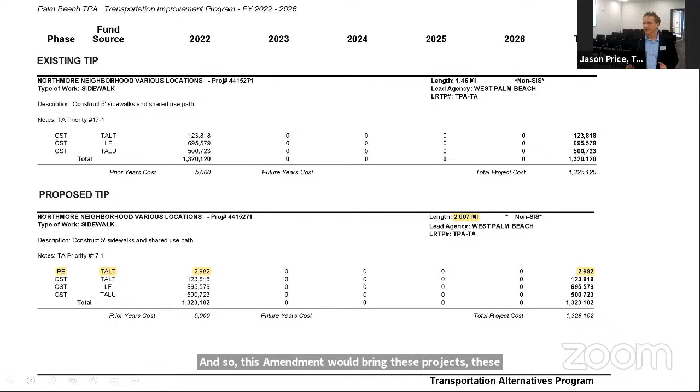And with that, that's the conclusion of the presentation, and I'll take any questions at this time. We're looking for a motion to recommend adoption of Amendment 2.

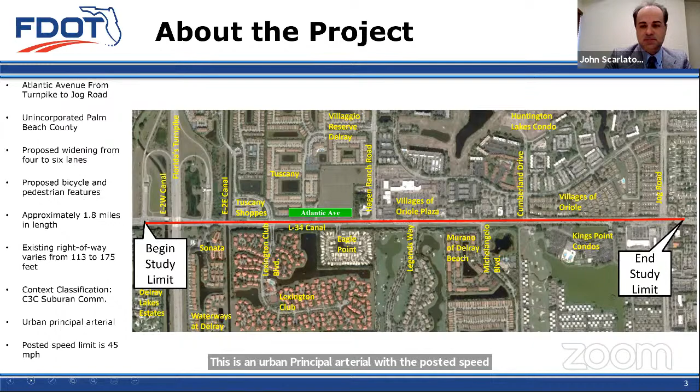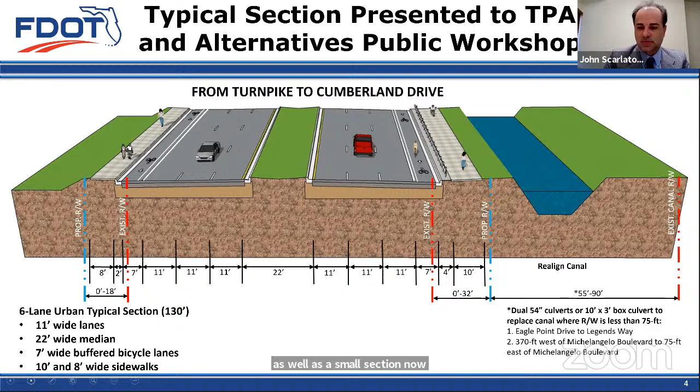So with this typical section from Eagle Point to Legends Way, that would be our tightest area where we would likely be needing to box the canal, as well as a small section near Michelangelo Boulevard for about 370 feet or so.

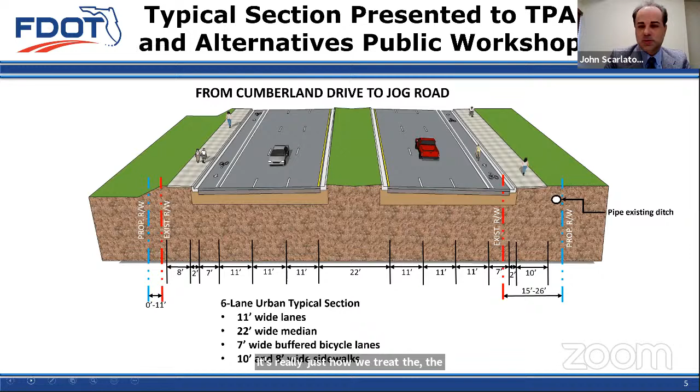So this is the next section from Cumberland to Jog Road. There's a ditch on the south side within this segment, so we would be looking to pipe that ditch, and we are coordinating with Lake Worth Drainage District, and they are okay with us doing that within this section. The typical section elements are still the same as the previous one. It's really just how we treat the right-of-way acquisition here on the south side, where we don't have the canal. We're now just having the ditch.

Next typical. Some of the feedback that we received from the TPA board was to look at wider pathways or potential shared use paths on both sides and physical separation of bike lanes along the corridor.

Following the TPA board meeting, as I mentioned, we held a public workshop. One was using the GoTo platform on June 28th and then in person on June 29th. Some of the key feedback we obtained from those meetings was concerns regarding noise with additional traffic or added lanes, impacts to driveways on the south side where we have some of the community entrances, as well as some U-turns and access at Eagle Point, where the residents feel that it's difficult to get into the neighborhood with vehicles making U-turns and so forth.

One of the key things I want to highlight is the physically separated bike lanes that was requested from Commissioner Sachs, and that's kind of in line with some of the feedback I mentioned from the TPA board. So let's take a look at some of the ideas that we came up with.

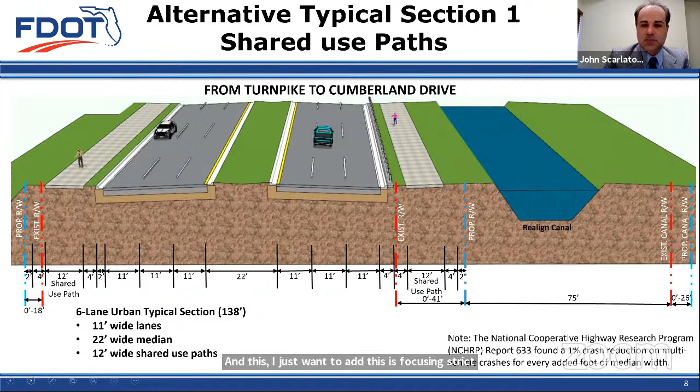Next slide. The next typical section that we looked at is physically separated bicycle lanes. Here we have a 3-foot buffer between the outside travel lane and the bicycle lane, and within that 3-foot buffer there's a 2-foot physical raised separation. That's going to provide physical separation for vehicles - if they're traveling, there's something they would bump into without going into the bicycle lanes. So that's a 3-foot buffer, 2 foot of that is physically raised, and you'd have a 6-foot bicycle lane. This is on both sides of the corridor.

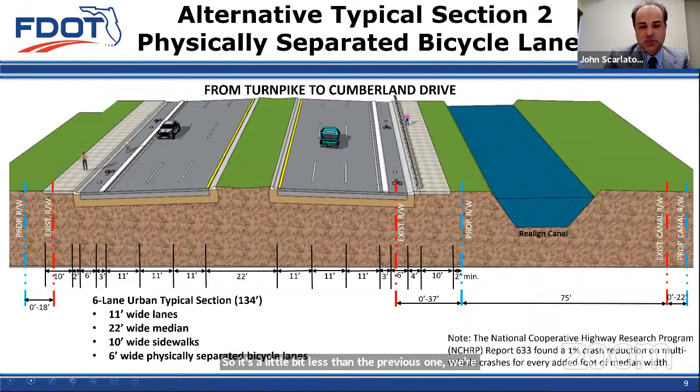In addition, we would include 10-foot sidewalks on both sides as well. The canal would be similar to the previous one. If we were to hold a 75-foot right-of-way width for the canal, for this typical we'd be looking at up to 22 feet - a little bit less than the previous one. We're now at 134-foot overall typical section.

This is similar to the first one we presented - still having the shared use paths on both sides, but we were able to reduce the width for the canal by putting a sheet pile wall along the north side of the canal. So that 75-foot width that we had before, which included a 10-foot maintenance berm on the north side of the canal, we were able to eliminate and reduce the width of the canal by a couple of feet.

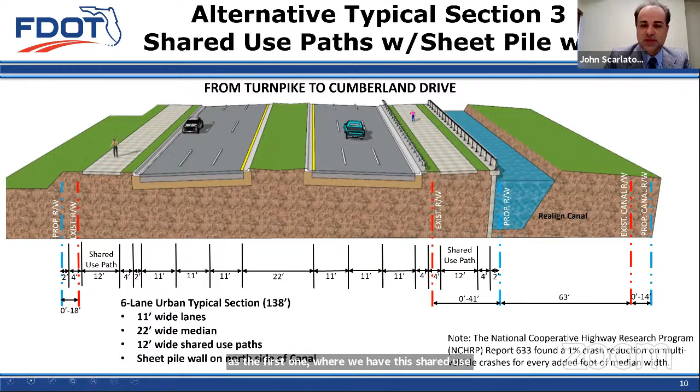So overall, we took the 75 down to 63, and that now reduces the impacts that we would have on the south side into some of the private properties up to 14 feet. But the rest of the typical section elements would be the same as the first one, where we have the shared use paths. These are 12 feet on both sides and no on-street bicycle lanes.

Potential increased impacts to the Kings Point Shopping Center. That's over at Jog Road, which would also include parking impacts at Walgreens, and some increased residential impacts between Cumberland Drive and Jog Road as well, which would be generally on the north side.

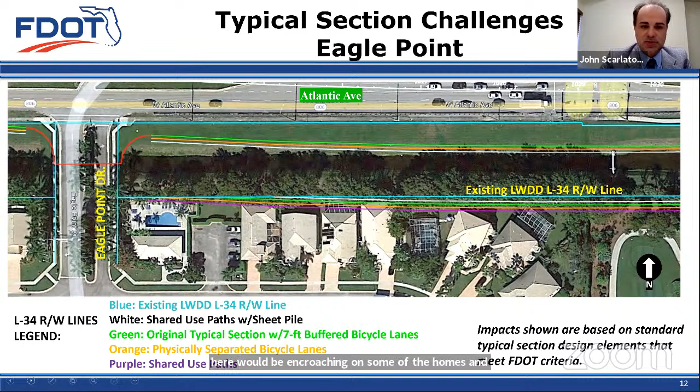The shared use paths, which was the first concept that we showed, would be the worst one. As you would see here, we would be encroaching on some of the homes and patios and so forth in the Eagle Point community.

So that's the area that we're looking to box in order to avoid having those impacts that we've just shown on the previous slide, as well as the short segment between Legends Way and Michelangelo Boulevard that I mentioned earlier. There was about 370 feet that we would look to pipe the section.

Which would be inside the private property. So not just Eagle Point to Legends Way, which is the first portion, which we were looking at doing, but it would be almost the entire segment we would need approval for.

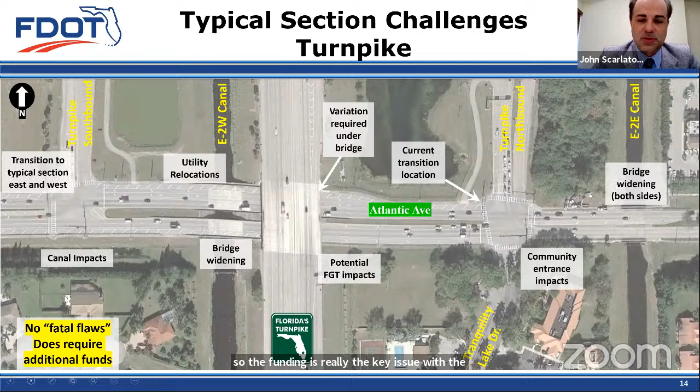On the E2W canal, these two bridges, we originally were just going to be striping through here, so there wasn't going to be any widening of the bridge. But with any of these new alternatives, we would have to look at widening both of these bridges, as well as the associated utility relocations, as well as some coordination and approvals from FGT, as we would be widening over the FGT line. Overall, there are no fatal flaws with this, but the key thing to consider is there's going to be a lot of additional costs. So funding is really the key issue with the additional work that will be done through the turnpike with one of these new typicals.

Next slide. This is a comparison of all of the various alternatives. The no build alternative is something we still carry forward as an option in the PD&E study. The 7-foot buffered bicycle lanes is what we presented back in June. You'll notice a lot of improvements here for vehicle safety, traffic flow, as well as access, and these are all being compared alternative to alternative. You'll see a lot of yellow dots on the 7-foot buffered bicycle lanes, construction costs, and so forth. As far as costs go, the most expensive would be the sheet pile wall—putting those walls would be very costly, so that would be our most expensive option.

As far as bike-ped safety, any of these new 3 alternatives we feel would be the safest for bike peds. Even under the original alternative it would be better than what's out there today in terms of bike-ped safety, but the 3 new options we've presented will enhance that even further. But there are more associated right-of-way impacts with those alternatives, as well as utilities and so forth. Next slide, please.

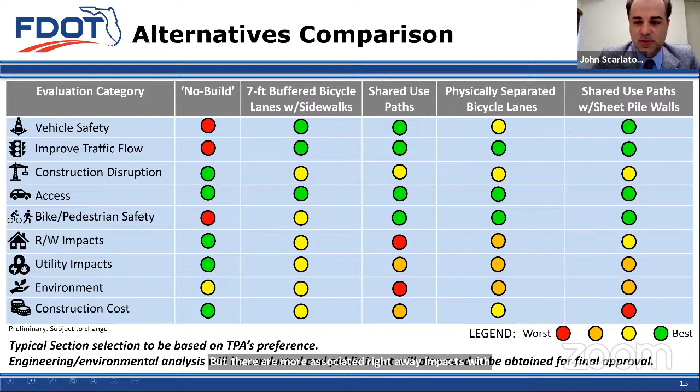So the Jog Road intersection—this was something we had presented 3 alternatives for back in June. The partial displaced left turns was the alternative that would achieve acceptable level of service in the design year 2045. With further coordination with the TPA staff, as well as internally with the department, this concept wasn't supported due to the following reasons: additional right-of-way impacts, multiple access issues associated with it, pedestrian safety concerns, as well as this just being an unconventional type intersection for Florida. It would violate drivers' expectations, as people are not very familiar with this type of configuration.

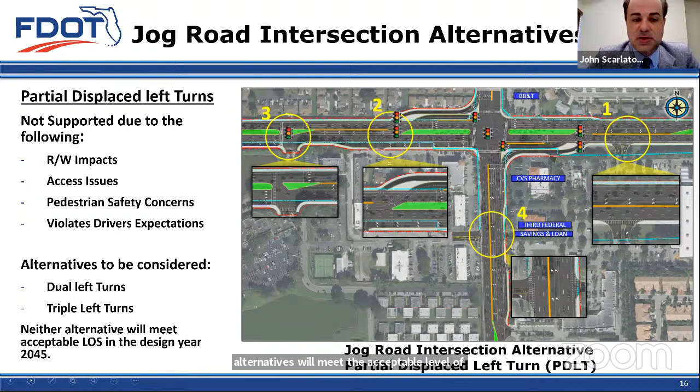So with that, we would still be evaluating 2 other alternatives: maintaining the existing dual left turns that are out there today, or expanding the intersection with triple left turns. But we just want to point out that neither of those alternatives will meet the acceptable level of service in the design year 2045. Next slide.

Next slide. And with that, Tuk and I, as well as Rudy Gottmari, the consultant project manager, are all here to answer any questions you may have. Thank you.

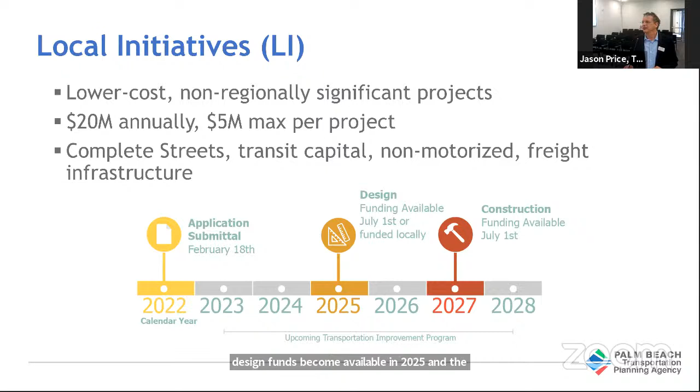As for the guidelines and timeline, the application submittal cycle will end on February 18th. If you're successful in getting funds from the TPA, design funds become available in 2025, and construction funds will follow in 2027. That's the layout of the funds that would become available if you're successful with a grant application for local initiatives.

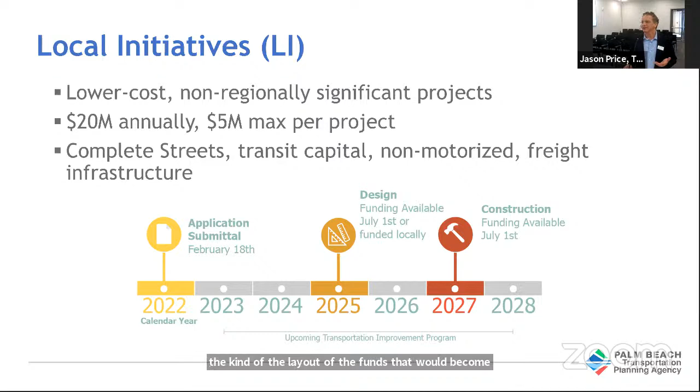There were a few program scoring changes to go over from last year: we've removed the bicycle and pedestrian length point multiplier that we saw last year. It constrained a few of the projects that were over 2 miles. Since there's already a cap of a maximum of 10 points, there was no real need to limit the length of the funds, because there's already a cap on the number of points that you can receive.

The next change is we've also added, as the preferred facility type for 5 points, the 10-foot shared use path. As we discussed in the previous presentation, we're advocating for 10-foot shared use paths as the preferred alternative, the desired kind of infrastructure we'd like to see built and applied for. So we've structured the points to reflect that.

The next change is we've updated the traditionally underserved index based on best practices. Through these best practices, you'll see on the next slide that we've incorporated a lot more indexes, including racial minority, ethnic minority, below poverty, limited English proficiency, persons with disabilities, elder, youth, and a few more. So all those are incorporated and rolled into what makes up the traditionally underserved index. It's more comprehensive and more in line with best practices, so we've made that change to reflect in the scoring system.

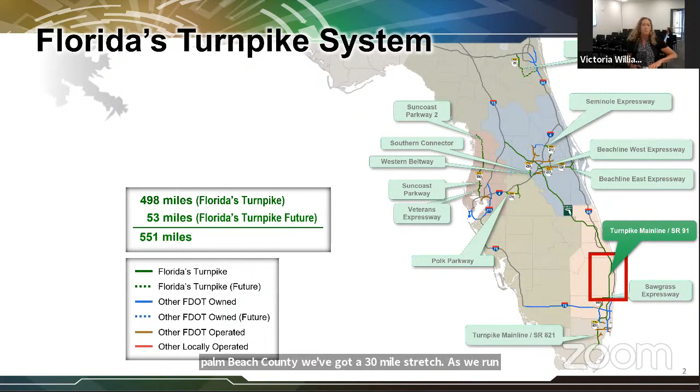Florida's Turnpike's mission is to help meet the state's growing transportation needs, ensuring value to customers, protecting investors, and managing this turnpike system in a business-like manner. With that mission in mind, the projects we'll discuss today support the Department of Transportation's vital few core areas, which are to improve safety, enhance mobility, and also inspire innovation.

Then we have to pay off the debt on those bonds that we issue to construct major projects. It should be noted that due to our very high credit rating, the Turnpike has historically benefited from some of the lowest borrowing costs in the toll industry.

Then we'll reinvest that revenue into renewal and replacement of pavement, such as resurfacing projects or other kind of recurring improvement costs. Finally, we'll use the remaining funds to pay for capital improvements, such as widening or interchanges. So in that process, we do prioritize. Here's some information about our approach to prioritizing.